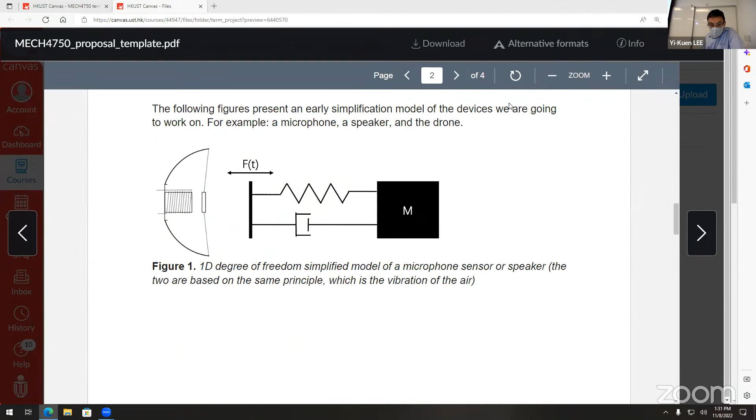I think it's time for me to ask the students to come up with this kind of project. Again, I told you in the beginning we have no final exam, but I do want you to think about how to work on some project on vibration engineering. If you look at our Canvas website, we do have some examples of this kind of project you may want to consider for practical vibration engineering. This is just one template for you to think about, to make a project. Of course, if you have your own idea, no problem. If you don't have an idea, I can also come up with some recommendations for you to consider.

Vibration engineering has many applications, so it's really up to you to think about what kind of project you want to do. In the past, if you wanted to work on something practical, I could also ask our Yunzhou Tech to give you a project related to their company's vibration engineering work. So what do you think? Do you prefer a project related to a company, or do you want to come up with your own idea? That's also fine. Do you have any idea about the project you want to do?

In the past, some students came up with their own project, and some students wanted to do something different. Yunzhou Tech is run by one of our students, a key student. Do you know how big the company is now? It's about 600 people now. Is there anything you want to work on related to some company or thing?

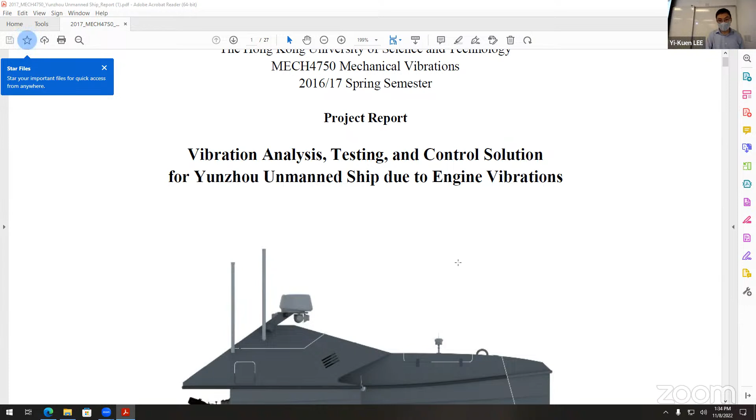I want to ask if you want to come up with your own idea, or work on a project related to a company like Yunzhou Tech. I know the founder and CEO personally, he's actually a graduate of our program. He has 600 people in his company now, and I know they intend to do an IPO and become a public company. You can look at the introduction of Yunzhou Tech. I think it's quite impressive, they really do a good job. This company does good work and has so many products. What do you think, would you like to work on a project related to this kind of company?

In the beginning, the first prototype he made here on campus was an electrical ship for water pollution monitoring. Then he quit his PhD program and started a company. Now he has 600 people. Mr. Zhang Yunfei is a pretty big boss now, 600 people, it's pretty impressive. He has so many products now, and originally it was only for pollution monitoring, but now there's a lot more. It's quite amazing to see that our students can really do a very good job. If you look at what they have, it's very impressive at Yunzhou Tech.

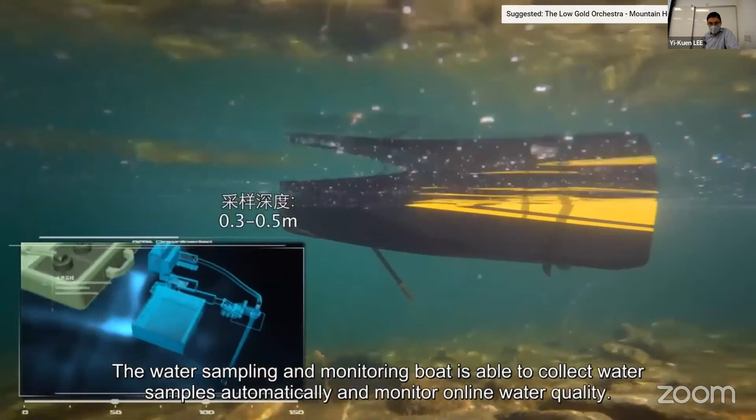The water sampling and monitoring boat is able to collect water samples automatically and monitor online water quality. The software can output water quality parameters, contour maps, and track pollution sources. The water surface cleaning boat can collect floating garbage on water. The hydrographic survey boat is designed for automatic underwater survey and mapping, greatly increasing the survey accuracy and efficiency of traditional operations. The industry leader, USV, will continuously dedicate itself to safety.

Well, what do you think? Do you want to do something related to this kind of company project? I could talk to the CEO and ask if they have some ongoing new project for the product. What do you think? Anyway, it's up to you, but if you look at this reference, some students came with their own idea for the project. If you want, we can discuss it further, okay?

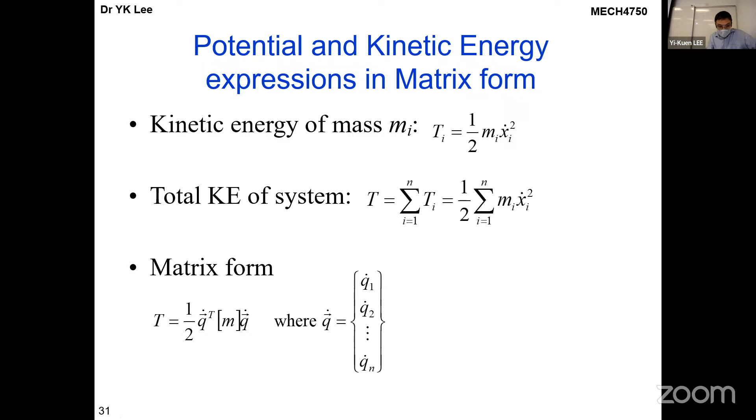Then we can sum up this energy. So we have an n-degree freedom system with n masses m1, m2, ... mn, and the springs, and then... sorry, I think we need to think about this, and in general we can try to write down this.

If there's no damping, and we consider an n-degree freedom mass spring system in terms of an ODE system, this n by n matrix is what we'll show you how to get.

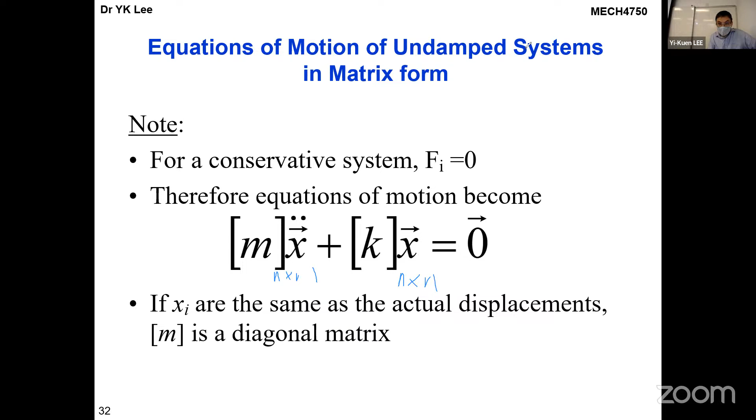And then the next one is how can we solve this problem under harmonic vibration? We can reduce this kind of ODE system, ordinary differential equation system, into a simplified linear algebraic equation.

So one simple way is we assume a general solution, so that for each mass, x1 for mass 1, we have x1 as a function of time multiplied by a capital X, this vector, and t. Capital T is a time-dependent function. This is a vibration amplitude vector. So each m1 we have a certain x1, m2 we have x2.

So this is a general solution, and then we substitute into our equation of motion. Eventually we do separation of variables, and we can rearrange this complicated equation, moving all terms related to the time-dependent term, capital T function, to one side and the other to the other side. Eventually, the left-hand side is independent of i, and the right-hand side is independent of time.

So in order to satisfy this kind of rearrangement, basically it's a simplified equation of motion, Newton's law. But in this way, because we make the assumption xi equals X times T, we can simplify this. So this is basically Newton's law in simplified form. In order to satisfy them, this one can only become a constant. So in this case, we can assume this constant to be omega squared.

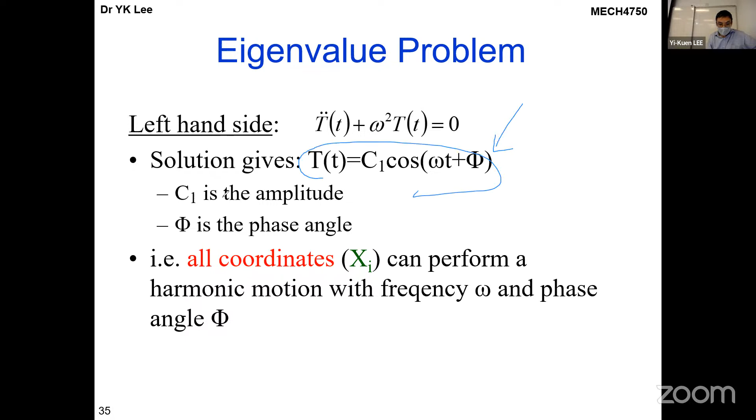So in this case, we arrange and find the left-hand side gives one equation for this time-dependent function, and all of you should have no problem with this, it's a second order ODE, so the general solution is this. The same thing on the right-hand side, we have another equation, and that is related to the eigenvalue problem.

So eventually this is the matrix K minus omega squared M, multiplied by this vibration amplitude vector, basically x1, x2, up to xn. This is n by n.

So in order to get this solution, this vector cannot be zero, only the matrix can be zero. So we let this matrix equal zero. The only thing you do is set the determinant of this matrix to zero.

And finally, this is exactly what we learned as the eigenvalue problem, like you learned in linear algebra. So omega squared is the eigenvalue.

I think officially we can use this way to reduce the problem. The key thing here is that under free vibration, there's no harmonic force applied, so the equation of motion reduces into this eigenvalue problem. This is an important point.

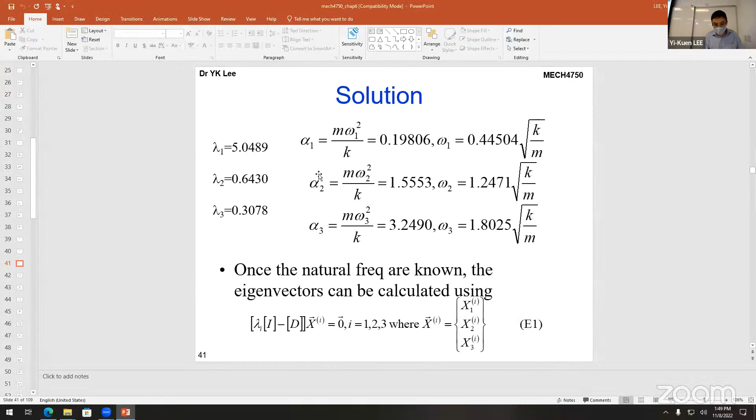That's something we'll show in our previous example. But what's important here? I think we already showed this example, so I'll skip this part, maybe just quickly repeat it. This is the problem we have solved. Let me try to use MATLAB now.

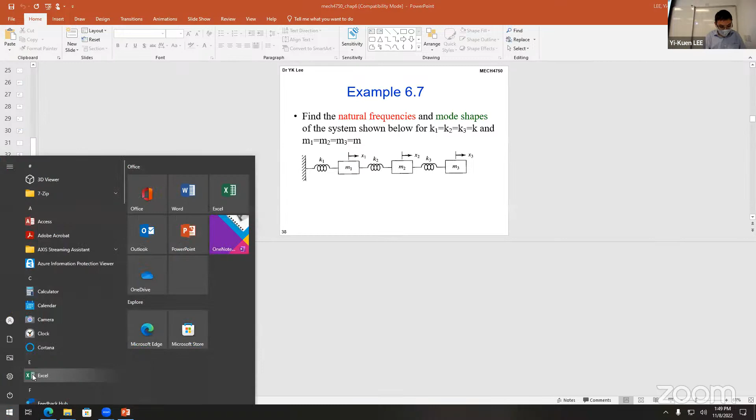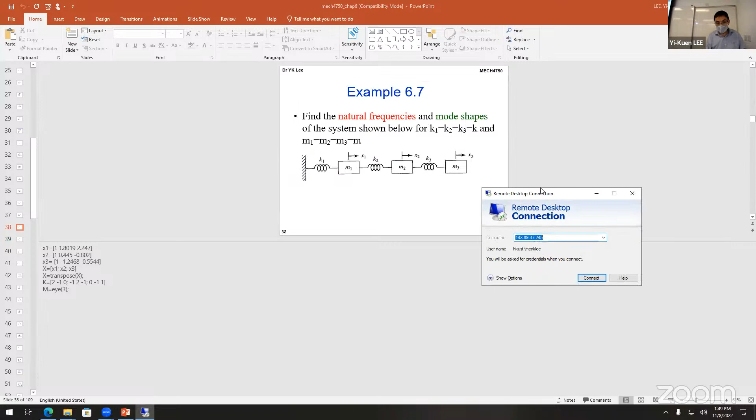Let me quickly show you an example for this 3 degree of freedom problem. If we know the M, C, K matrices, how can we use MATLAB?

So we already have this. Let me quickly go through it. For this example, we know all the mass and stiffness values: K1, K2, K3 equal K, and M1, M2, and M3.

In this case, with MATLAB we can easily build the K and M matrices. So with MATLAB, I'll show you that we can easily find our M and K.

And then the next step, of course, is to use the EIG function to get the dynamical matrix. We calculate our dynamic matrix, the inverse of K multiplied by M, and then use EIG to determine our VV and DD.

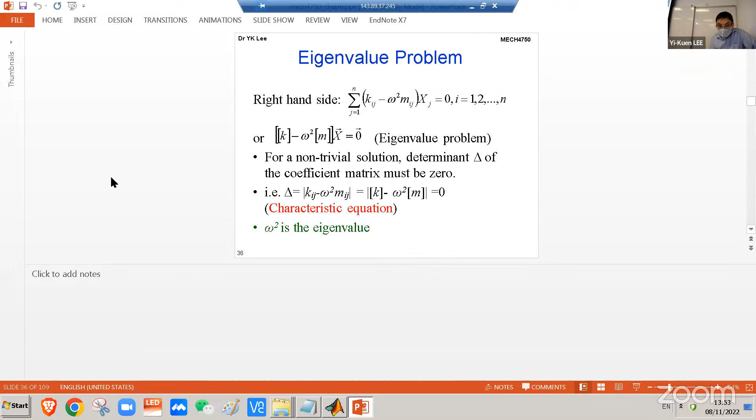Okay, and then next one is calculate omega. Remember, because omega is related to the inverse of lambda. You look at the equation with the right, so that's our dynamic matrix here, so that lambda equals 1 over omega square.

So in this case we can find our omega equals square root of inverse of lambda. Remember this period, because this is a vector. So when you do this, if you don't have this, then you get some problem, an error. If you use this guy, then no problem. If you don't use this period, then whatever you get is not correct. So we want to divide by each component of the lambda vector, so that we can get the right solution here. So this is our omega, actually related to omega square.

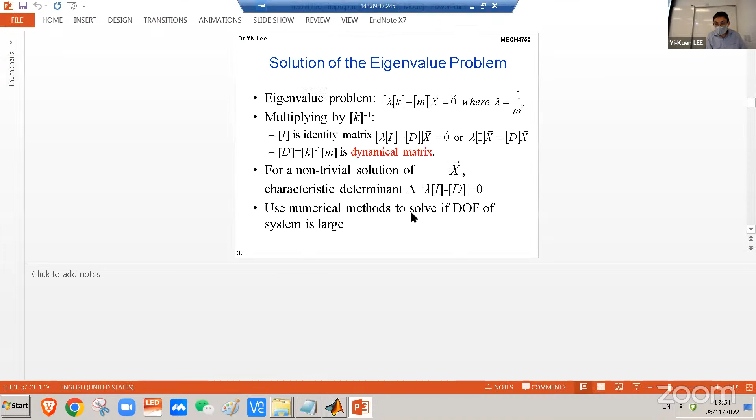So we need to do square root of this kind. If you look carefully, we need to use this kind of square root. So this becomes omega, and then of course the next one is we can collect those here.

V1, VV is a stack of 3 vibration modes, right? So this means we try to collect the first, basically VV here.

Right, so basically we have X1, X2, X3. So in this case we try to collect this one, we try to find the first column. This means first column, one, first column of this VV matrix, and then this one second column, and 3, 3, 3 here, third column. So in this case we can get the vibration mode for V1 for first omega 1, V2 omega 2, V3 omega 3. So this is the one we can use MATLAB to calculate it.

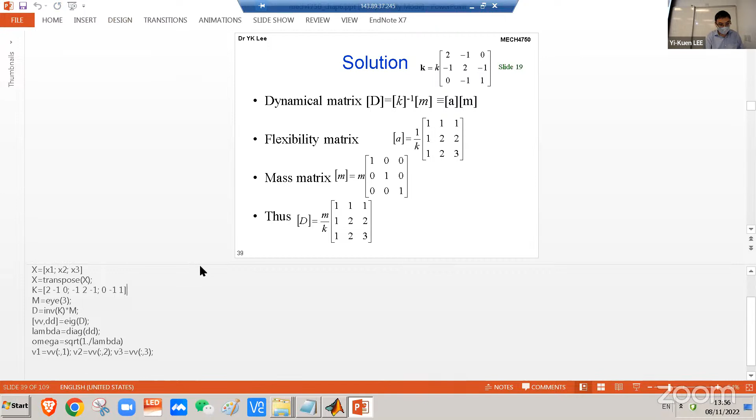And finally, what's the next step? We should plot this kind of response. You want to look at the vibration mode as function, so that eventually what we'll do is we try to think about how we can get this kind of vibration mode. Our goal is to try to study this kind of vibration mode.

So we show here, then actually I already try to plot this one. Let me quickly... And then of course, actually, I already told you that MATLAB can try to plot this kind of vibration. There's a way we can try to do this kind of...

To place this kind of vibration as a function of time, so I hope you still remember, basically for each vibration mode it's a function of sine omega t. So once you find each vibration mode, in reality each vibration is actually multiplied by some kind of harmonic function. So each x1 basically relates to some kind of sine omega t harmonic at that particular frequency, omega 1. Why x2, vibration mode 2, equals maybe sine omega 2. So you can also ask MATLAB to try to plot this kind of time-dependent vibration of this 3 DOF model for your mechanical system.

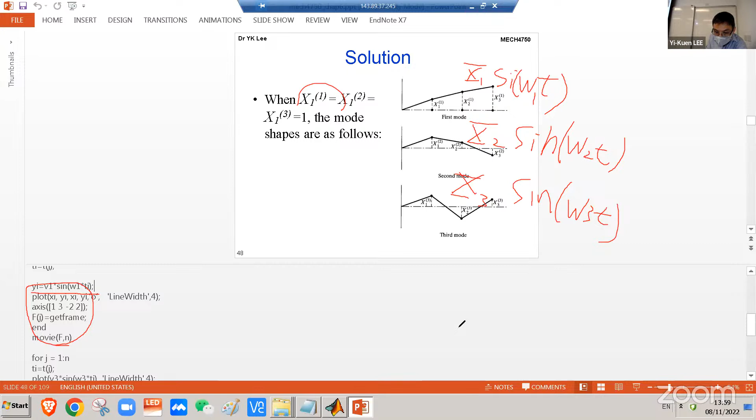So in this case, here I show you that we can use this kind of thing, for each vibration amplitude vector equals vibration mode times sine omega t, so that we can plot this one, and then for every time we plot this particular moment, and then we can make a movie to show this kind of vibration as a function of time. I don't know, do you still remember how we showed it? Basically, this is the way we can make this kind of animation to visualize vibration as a function of time. Do you have any question about this thing? MATLAB is useful, let me quickly show you this.

Right. So there's some problem. Oh, sorry, when I plot this one, I understand, we may need to... let me check if I need to. So do you understand what's the problem? Problem is this one. Sometimes we need to use this kind of... let's try to copy.

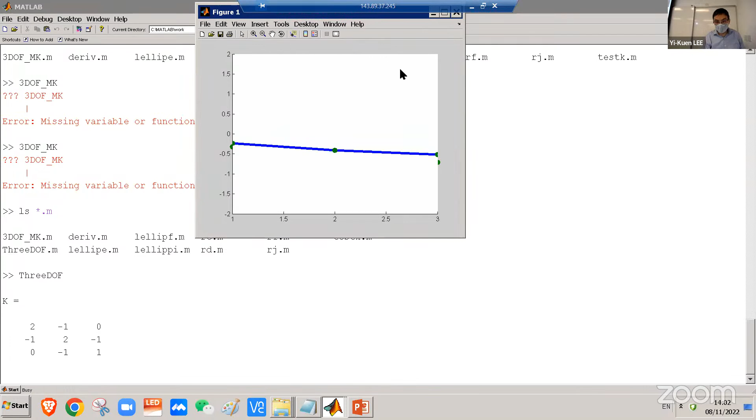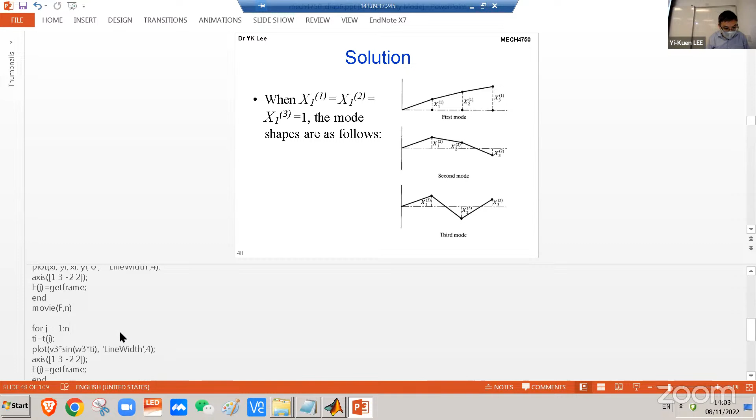We can visualize the second vibration mode, right? Using the same chip, basically for the second vibration mode, you need to get another V2. You use V2 and then try to plot V1, V2, V3, so that we can do the same thing.

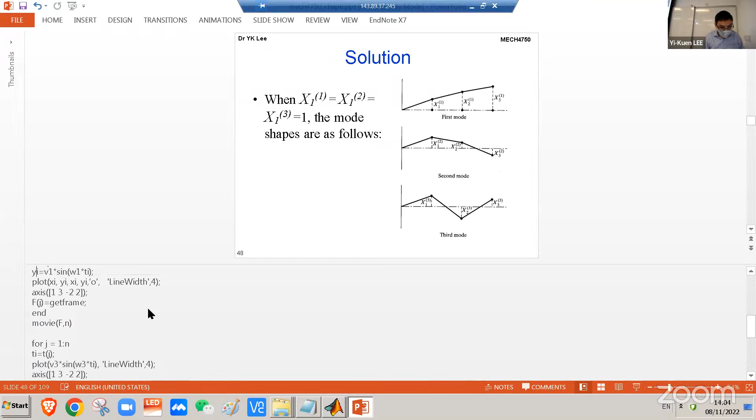Vibration 2. So this spatial natural frequency, they have this kind of vibration mode. And then next one is another. Finally, we have another vibration mode, right? V1, V2, V3. So all the others use the same method.

You just try to. I probably can go. So I have V3 and then another V2.

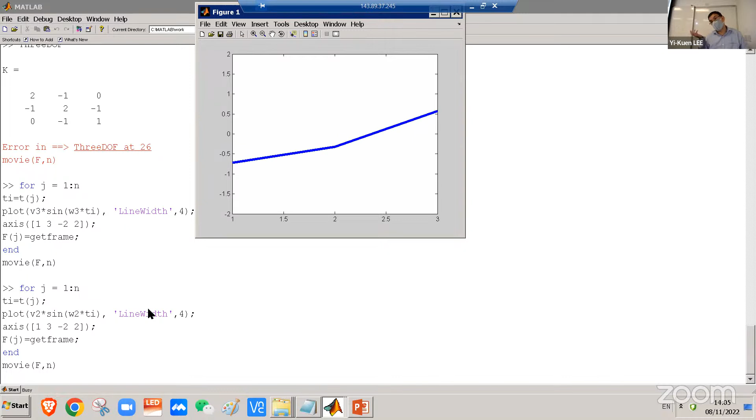So now I show you the number 3 vibration mode. Any question? Of course, this is the one with 3 degrees of freedom, right? So that in reality, if you have more freedom, then you can process more complicated vibration of a mechanical system. More complicated. Yeah, if you, this is on 3 degrees of freedom.

So I think this gives you this kind of introduction about how we can use MATLAB to... sorry.

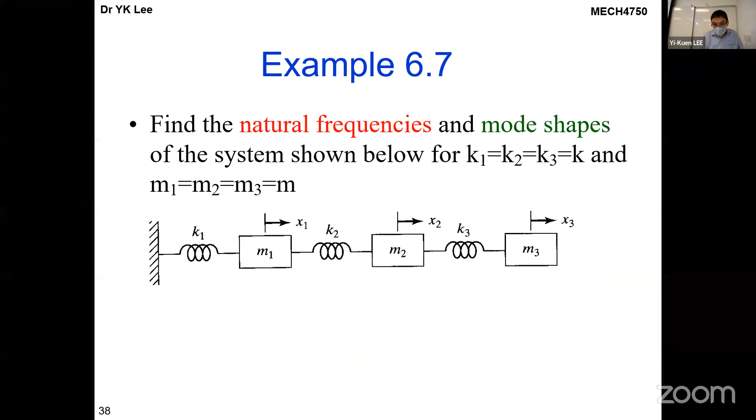So now the next question is I need to show you another important property, orthogonality of a vibration or normal mode. Sometimes we call this another name, sometimes we call it the vibration mode, right? Or normal mode. Vibration mode, we just showed you, right? And sometimes it's actually related to the eigenvector. Eigenvector, we just described here in MATLAB.

So what's the meaning of this orthogonality of the vibration mode? It means we can demonstrate this kind of thing. I will not show you all the mathematics, I just show you the idea. Actually, for each of these vibration modes or normal modes, they're useful for what? Basically, I'll show you why. In MATLAB, I'll show you this kind of x1, x2, and x3.

Why? So these vibration modes or normal modes have this special property to be orthogonal. Orthogonal means perpendicular to each other with respect to k and m. So this means vibration mode, this is a vector and this is a vector. So the x1 vector is perpendicular to x2 with respect to our m and k. So that thing is quite important. And x3 is also perpendicular to all the other things.

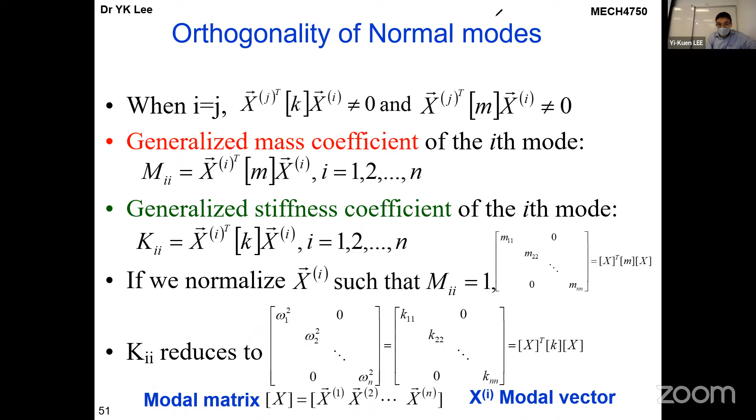Actually, we already calculated this in MATLAB, right? So basically this is related to the modal matrix, related to what we remember as our V, VV, and DD in MATLAB. Well, eigenvalue here, so that's basically what we just described - it's a modal matrix, and each one is a modal vector. So with this kind of property, we can really try to simplify our problem.

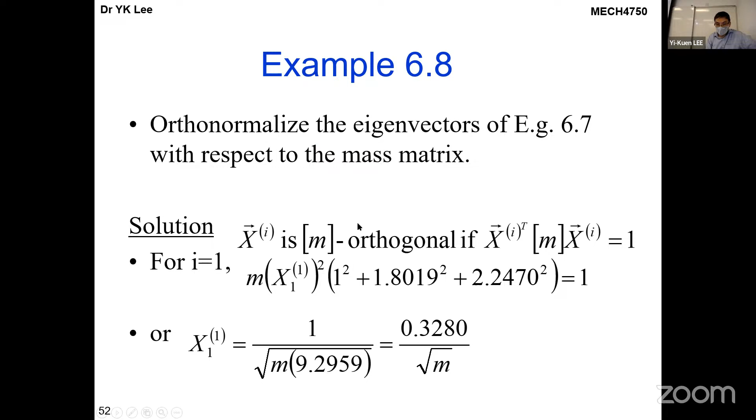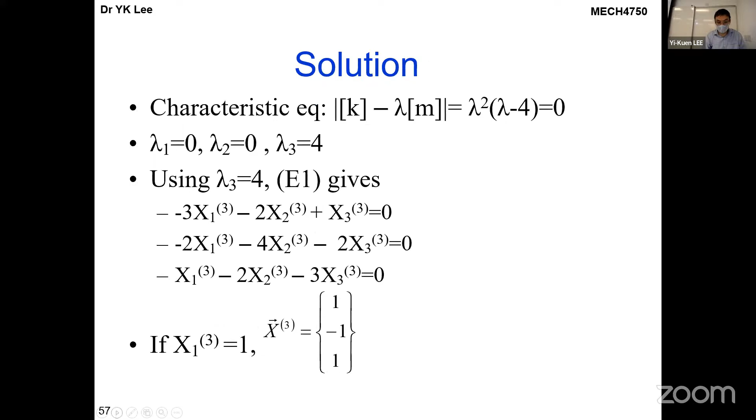Of course, we can show you this orthogonality of our previous one - that is very easy to show. Now they are really orthogonal. Do you see? And again, the most important result is we can really demonstrate that...

I will skip this kind of complicated mathematics - the goal is simple. So once we have found this natural frequency, eigenvalue, eigenvector, vibration mode, our n-degree-of-freedom vibration problem can be simplified as this kind of thing. So let me show you here.

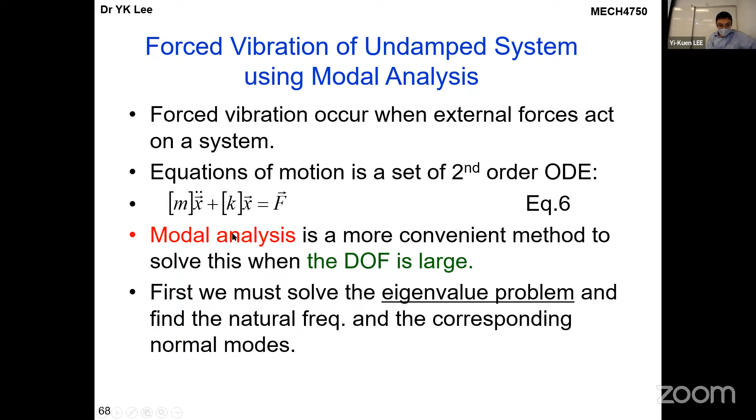Using modal analysis, if you don't solve for vibration mode frequencies this way, it becomes very complicated. We're solving an n-degree-of-freedom problem, and modal analysis is basically a tool we can use to simplify our problem.

I'll show you the result clearly: for n degrees of freedom, this vector is x1, x2, as a function of time, and xn, where n can be 1 to... It's basically a summation over n of vibration mode 1 with Q1, vibration mode 2 with Q2, multiplied together. So this is the modal matrix multiplied by the Q vector, which gives us the general solution.

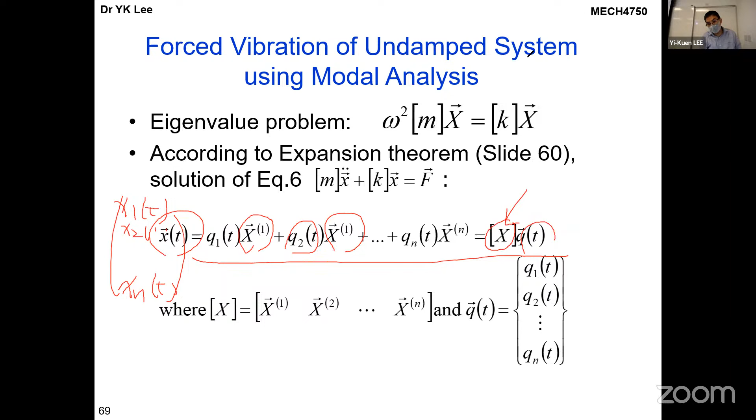With this modal analysis, I'll show you that we can reduce the n-degree-of-freedom problem into a one-degree-of-freedom model. This is our goal.

If we use this modal matrix, we can simplify our already complicated equation of motion from Newton's law, and do this kind of transformation. Originally it's a very complicated ODE system, but with this modal matrix - multiplied by its transpose and M, and with the vibration modes normalized - I can transform the system so that it becomes a one-degree-of-freedom, 1-DOF system.

Each Q1 relates to one vibration mode, Q2 relates to another - so we have Q1, Q2 for each mode, maybe omega 1, omega 2. This means in this case we have a one-degree-of-freedom problem.

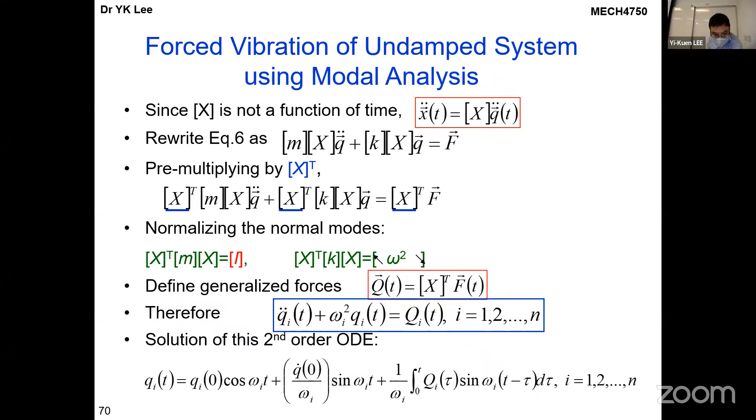Once we get the solution for each vibration mode - Q1, Q2, Q3 - we can do the transformation again, and eventually determine the vibration for each mass, M1, M2, M3. Once we have the solution for each vibration mode as a function of time, we can easily determine the vibration for each of M1, M2, M3.

That's quite important. With this modal matrix it becomes clear - based on the intrinsic properties of the mass matrix and stiffness matrix, eventually we only need a very small number of vibration modes to describe a very complicated mechanical system or product. This is one of the important benefits: modal analysis is very practical for simplifying real vibration engineering problems.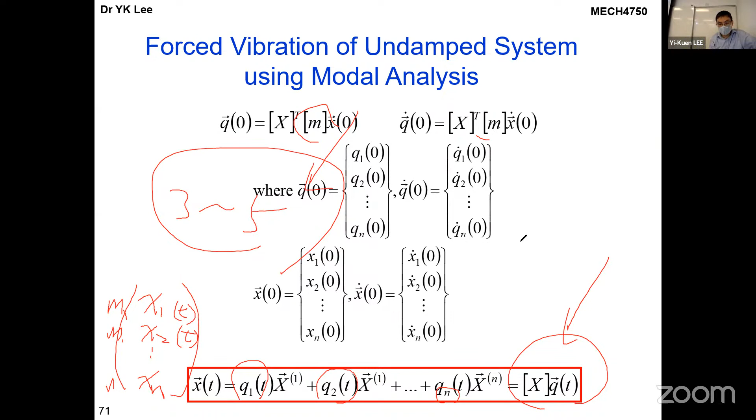So we don't need to use all n modes - typically maybe 3 to 5 vibration modes would be enough to get a reasonable estimation of the real vibration of a mechanical system. This is something important for all of you to think about.

Of course, let me quickly show you some examples.

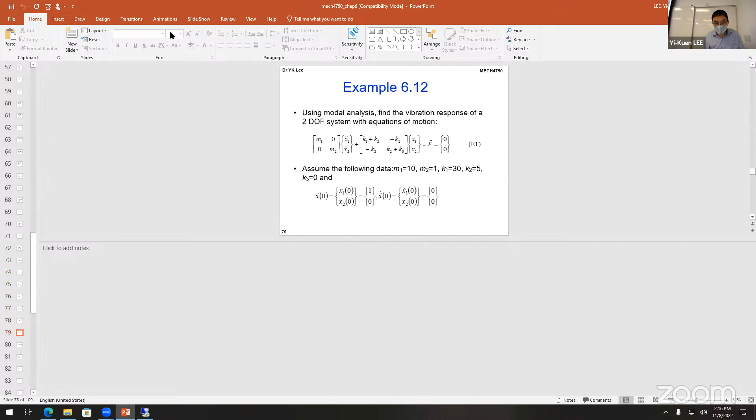Modal analysis for this kind of problem we described: for a 3-degree-of-freedom system with M and K matrices, if you use modal analysis you can simplify and converge M and K. Here I show you why we determine the vibration modes - 3 vibration modes - and stack each vibration mode into the modal matrix: vibration mode 1, 2, 3, along with M and K.

With what we've described, the transpose of the modal matrix multiplied by M and X - in this case we can get this result, which lets us simplify our original very complicated system.

Similarly, I can show you the orthogonality of these two vibration modes: take vibration mode 1, multiply by the K matrix and vibration mode 2, and when you calculate it, the result is almost zero.

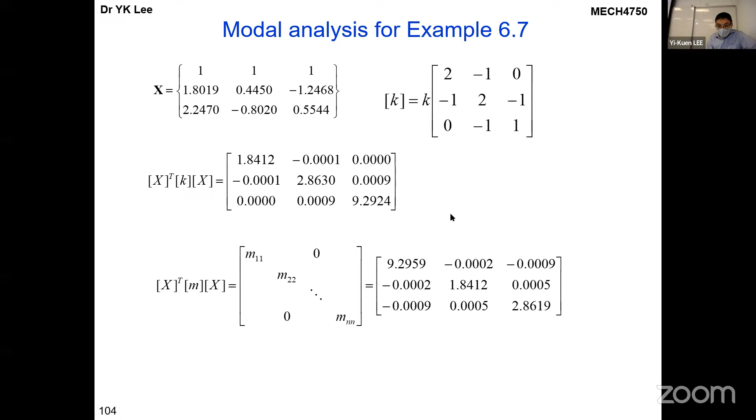And then eventually, once you do this, you see we can really try to do transformation with this kind of modal matrix. We can transform the original matrix into what? A diagonal matrix. This becomes quite important for us to simplify things.

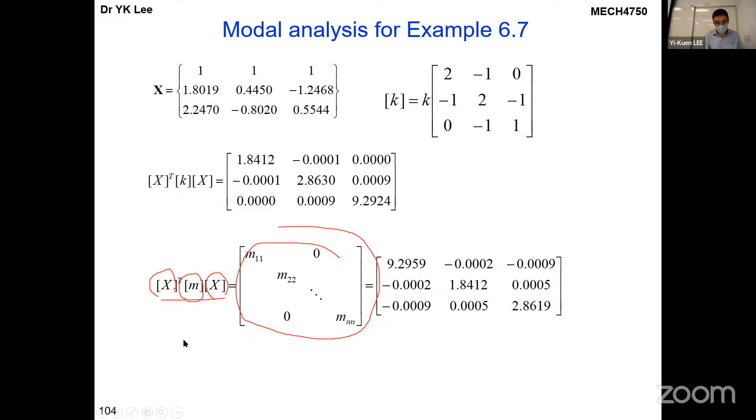The same thing, let me show you. I think you may want to see a real-world engineering problem. This is a 30-meter, well actually a much larger telescope project, costing almost $990 million. And how do engineers do this project? It would be interesting for you to look at the video of this project. Let me show you this kind of big vibration engineering project.

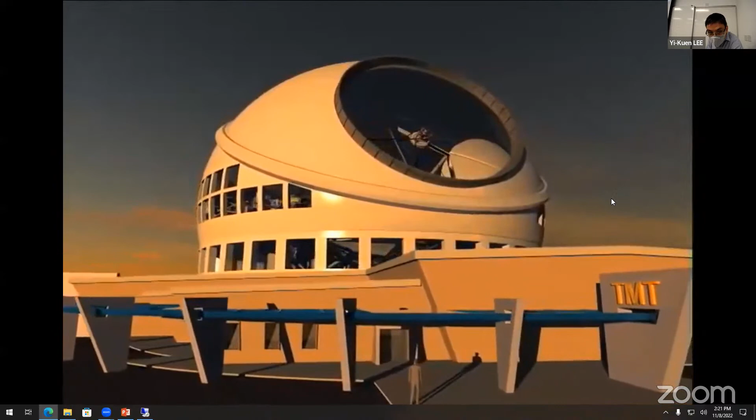Imagine yourself now in 2016 being invited to the opening ceremony for the 30-meter telescope, and imagine that you've been to see the 200-inch telescope. The first thing that will hit you is, of course, it is a larger dome, but not that much larger. What is greatly different is that the telescope occupies a much bigger fraction of the dome, and the mirror is enormous, and it will hit you in the face because it's such a huge mirror. The mirror is 100 feet in diameter.

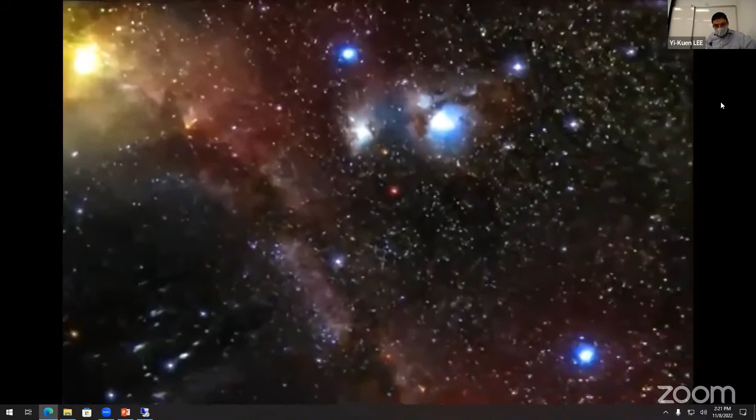The overarching theme for the 30-meter telescope is the history of the universe. It sounds simple, but really we're looking at understanding the origin of the universe, how galaxies like the Milky Way formed for the first time and assembled, how more complex molecules developed in space that leads to life forms. So it's a very grand but incredibly fundamental quest.

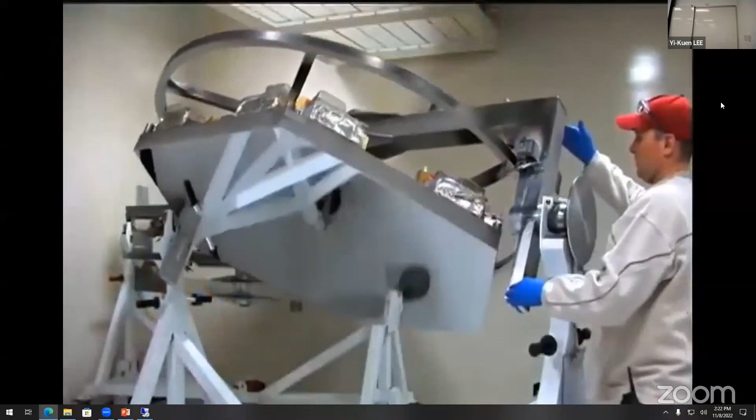The 30-meter telescope is a reflecting optical near-infrared telescope which has a reflecting primary mirror that's segmented, with 492 individual segments that combine to make a 30-meter aperture primary mirror. The light is reflected from the sky to a 3.1-meter secondary mirror and down to a third mirror, which we call a tertiary mirror, which rather uniquely can rotate to reflect the light to any one of a number of instruments. On the 200-inch telescope, instruments weighed a maximum of 1 to 3 tons, and here we're now talking about instruments potentially 20 to 30 tons or so.

The departure to a segmented mirror telescope was inevitable when we got up to the 8 to 10 meter class level. We would never be able to make a 20 or 30 meter single piece of glass. It would be extraordinarily difficult to support, and we wouldn't maintain the curvature over a very large area, and it would be impossible to transport.

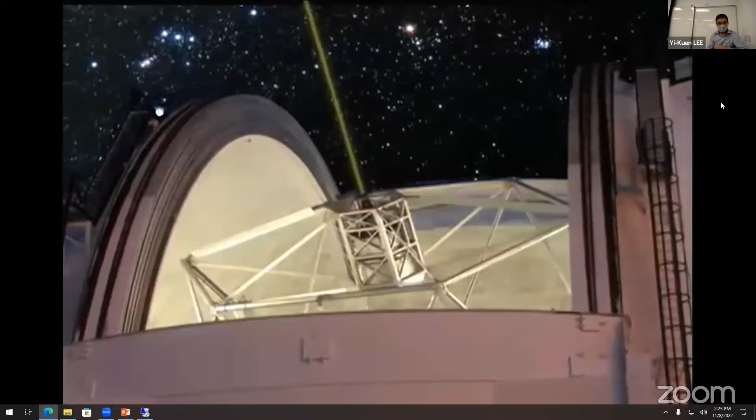Probably the most challenging aspect of the 30-meter telescope is the correction for the blurring in the Earth's atmosphere. This is a technique we call adaptive optics. It's already in regular use on our existing telescopes, such as Keck and Palomar. The way it works is we take the light from a reference image, either a star or a laser reflected off layers in the Earth's atmosphere, and use this signal to monitor the turbulence in the atmosphere. Now, the Earth's atmosphere doesn't behave in a very cooperative way. It's certainly possible to make this correction along one line of sight, but if you want to correct a cone of light coming through the atmosphere, then you need a number of lasers, each shining off different parts of the atmosphere, to create a correcting signal that can be applied to recover the true resolution of an object as if the telescope was in space.

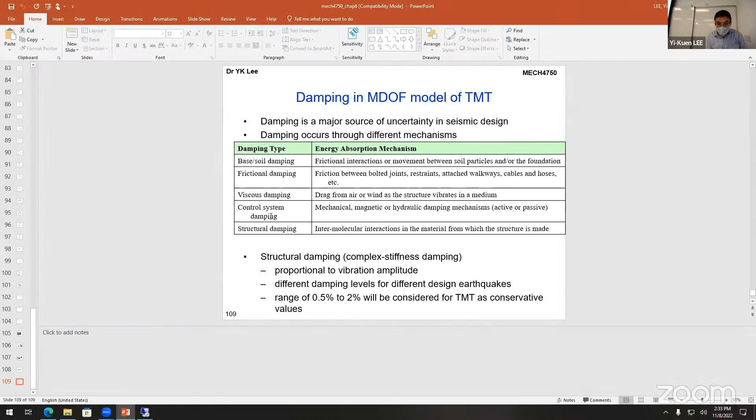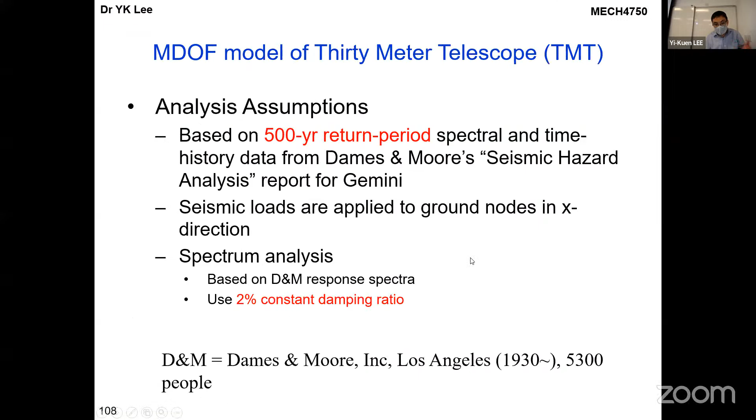Anyway, I'll just show you this. I can give you some additional reference papers on our Canvas website. At least this gives you a practical case study of this kind of N-degree-of-freedom system.

Why is N not 1 or 3? N is actually 35,000 elements, to really construct this kind of model to do this kind of analysis.

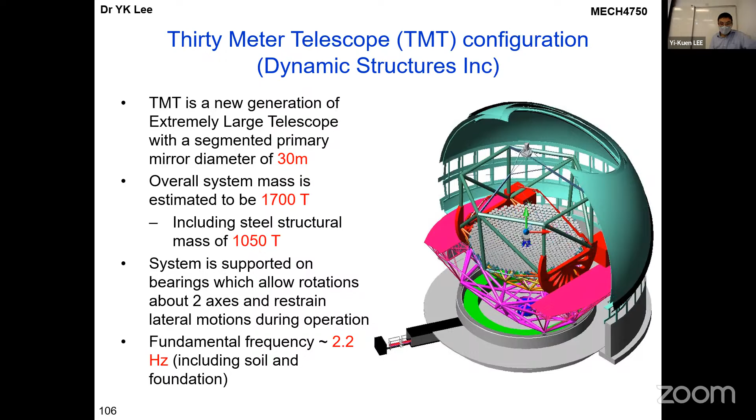Okay, do you have any question for this part? So that's why I show you this again. I do hope you'll find some of this content useful. I know some students may say they don't have any background in this area, but I'm showing you some real case studies because it's something important.

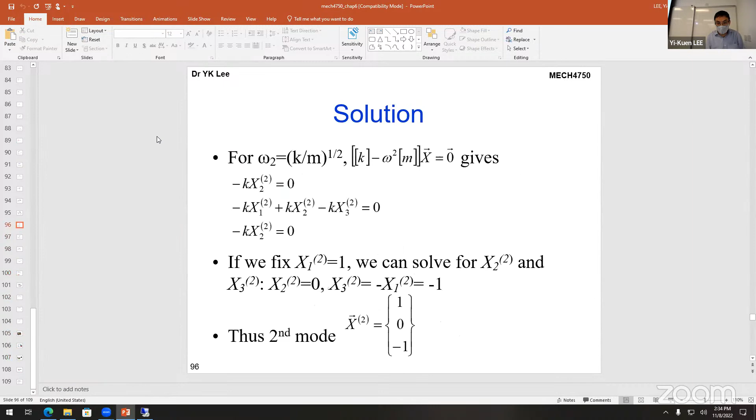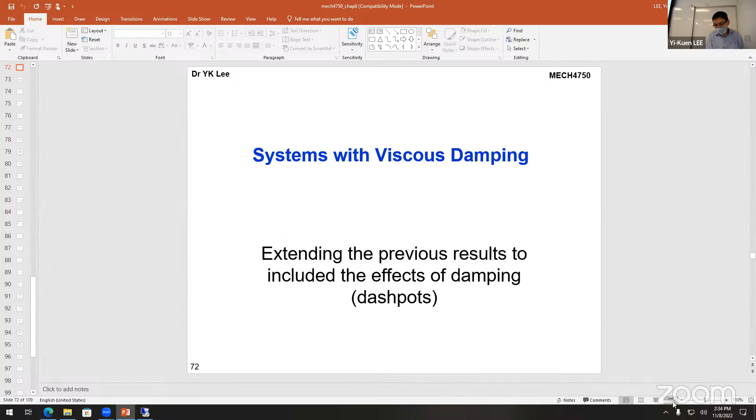Next, if you have no problem, I need to quickly go through another part about the MCK model - if we have damping, how do we look at this kind of damping when building the MCK model for an N-degree-of-freedom system?

Basically, there are two approaches. The first is just like this TMT model - we make some assumptions based on experience. In our TMT example, this is basically the model: we try to get some assumption, guess, or estimation based on physical elasticity, or try to model the damping. This is a typical approach in practical vibration engineering.

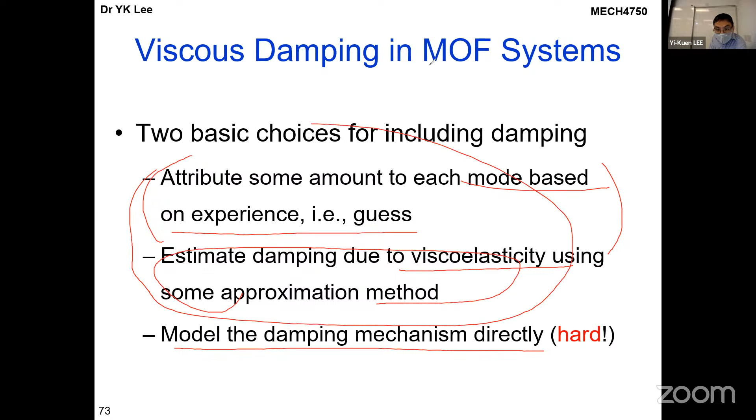Here we show you one approach called modal damping. Modal damping means, if we're able to use, for example, our simplified method described in this chapter, or FEM software, we can determine M and K, and then do modal analysis. In modal analysis, we find N vibration modes, and each mode will assume a certain damping ratio, a normalized damping coefficient. This is what we call modal damping.

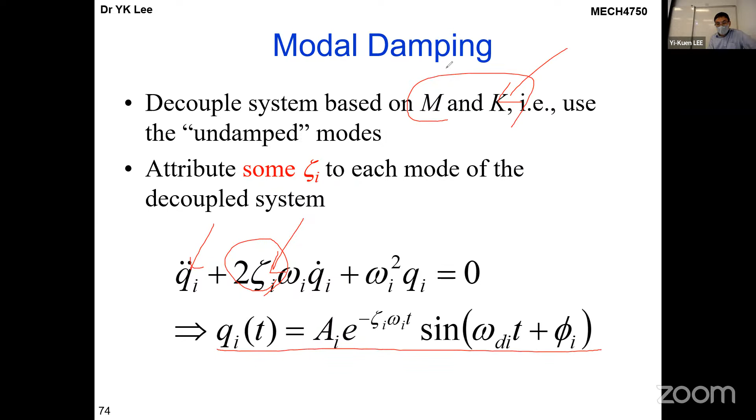Once you have this, we can easily do a transformation - we get the general solution for each vibration mode, and then convert it into physical space for each X1, X2, and so on. That's what we do.

The second approach is system-level damping. System-level damping addresses: if we have M, C, K, how can we determine a way to diagonalize M, K, and C? In general, it's not easy. So one approach in typical textbooks or even practical engineering is proportional damping, or Rayleigh damping. Basically, it's very difficult to diagonalize M, K, and C at the same time.

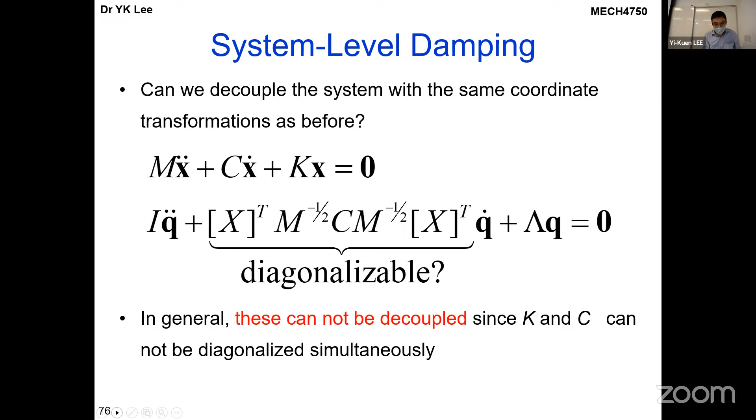If there's no damping, of course, I'll show you the vibration analysis eigenvalue - we can see if this is 0, it's easy. But that's why one idea came from Lord Rayleigh, more than 100 years ago, the very famous physicist in the UK. I can assume our damping matrix, N by N, is a linear combination of the mass matrix and stiffness matrix, where alpha and beta are unknown. This is quite important.

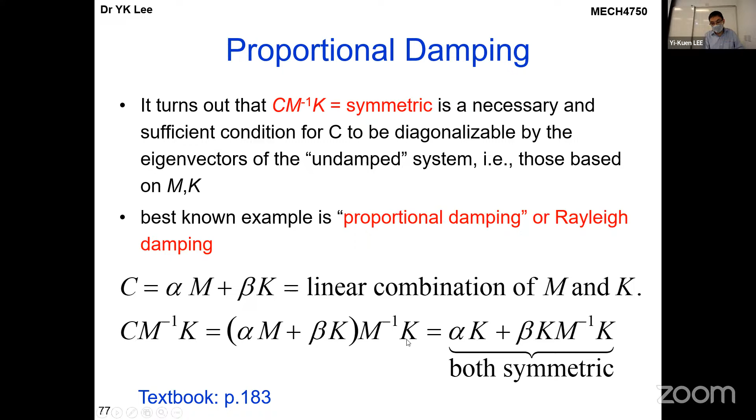That means proportional damping, or Rayleigh damping, basically assumes the damping matrix is a linear combination of M and K. Alpha and beta can be partly determined by vibration testing - if you use a motion sensor, like a smartphone sensor or some remote device, you get a vibration testing result, and then estimate alpha and beta. So this is the approach.

You see, once you have this, it's very easy. We can show why this MCK can easily, based on our eigenvalue analysis, give us a way to get the modal matrix, right?

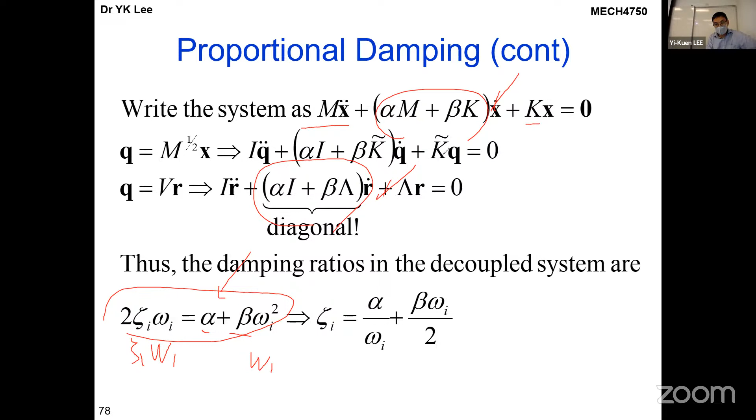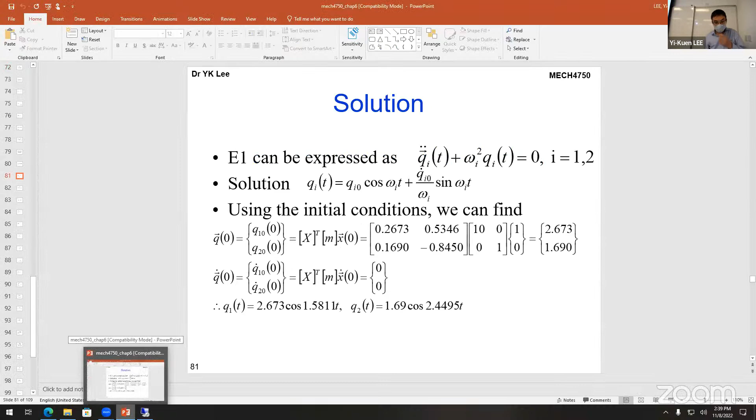And then I can easily diagonalize this kind of MCK system, right? So that this is something much easier. Eventually you can show this kind of alpha thing, in each vibration mode omega 1 with certain zeta 1, relating alpha and beta and omega 1 squared. So this is, at least for now, a simplified way to make this undamped MCK model practical for vibration engineering. This is very important, and I'll show you this is one of the important things we introduce here.

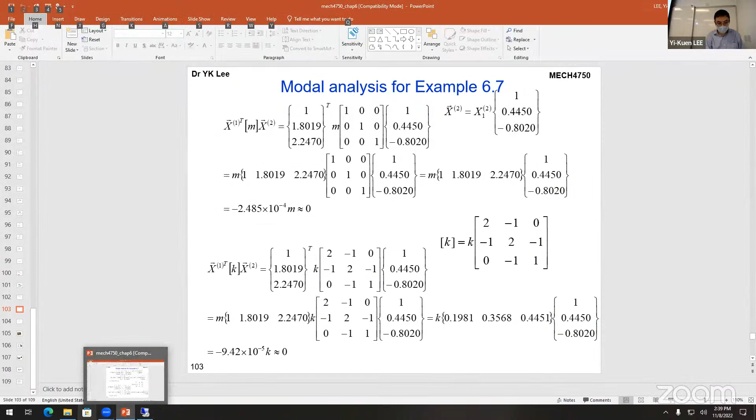I think we need to continue to the next chapter if you have no other questions. The next chapter is basically what we want to show in part: for some problems, can we go to vibration modes as N goes to infinity? That's another simplified way. Maybe I should only show one or two methods. This is about engineers sometimes being lazy, wanting to quickly analyze complicated mechanical systems without solving very complicated equations of motion. We don't want to solve this directly, so in this case, can we quickly determine the natural frequency and vibration mode? This will show you that approach.

Typically there's the Rayleigh method, matrix iteration, and the Dunkerley method. Why are these widely used in vibration engineering for many years, when computers were very difficult to access? Fifty years ago most engineers had a hard time accessing powerful computers, so how can you simplify the way to do it?

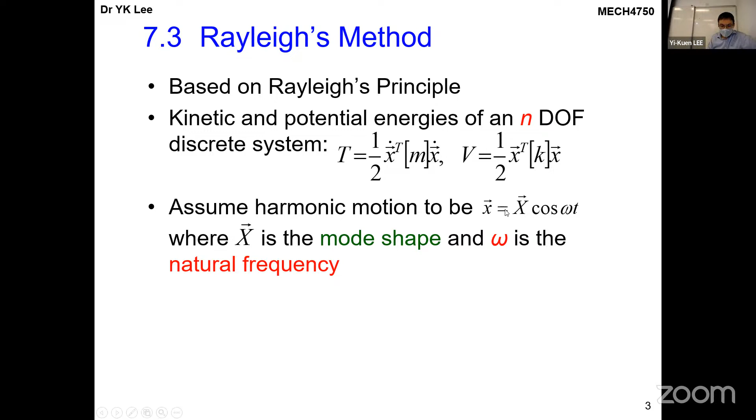Still, here the Rayleigh method will show you, based on the energy method. Basically, if your system has kinetic energy and potential energy under harmonic vibration, I can easily show you how to determine the maximum potential energy and maximum kinetic energy, T max. With this, I can estimate the natural frequency in a simple way. That's what I told you we will show.

For kinetic energy, it's 1/2 mv squared. Under harmonic vibration, 1/2... V equals harmonic x dot. Harmonic vibration means omega x, so in this case omega squared times vibration amplitude squared. And for potential energy, 1/2 kx squared under harmonic vibration gives 1/2 k times amplitude squared. So under harmonic vibration I can easily get T max. Setting these two equal, I can solve for omega. So for the one degree of freedom model, it's very easy.

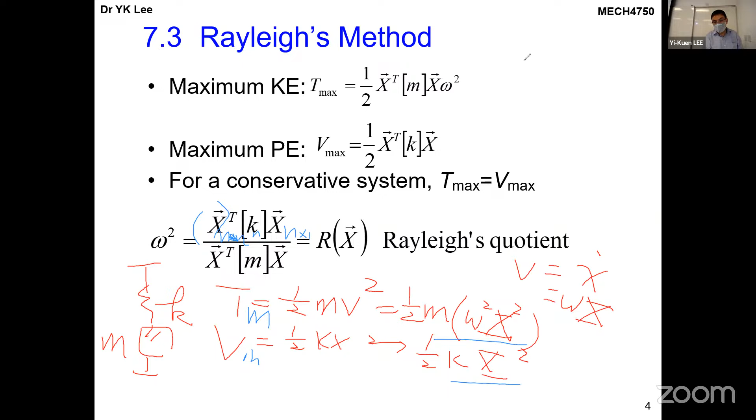But for the undamped multi-degree-of-freedom case, we need to consider the matrix operation. It's also not difficult to imagine: basically it's kx squared, but now this is a matrix, n by n. Sorry, this should be the vibration amplitude vector, not n. This n by n matrix allows us to easily do the calculation. So this method, for the undamped case, is very easy. I just wanted to give you this idea.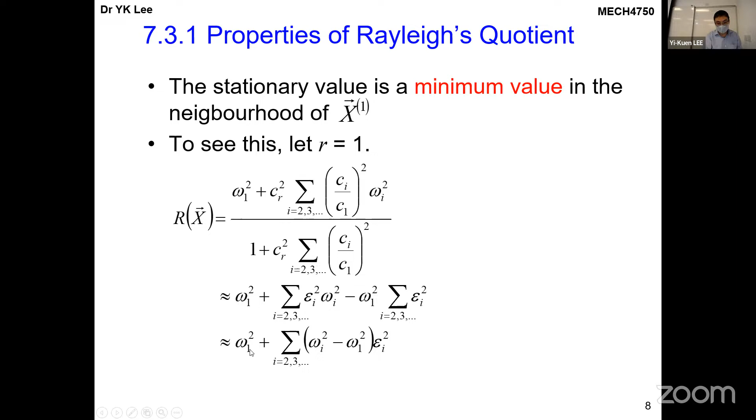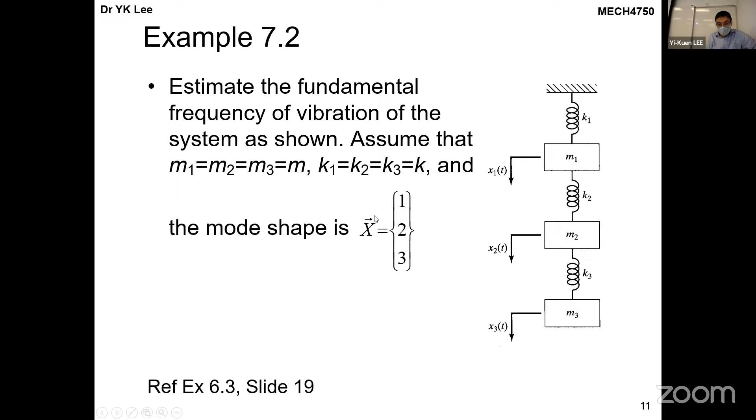Basically, you can assume a certain vibration shape, and based on this equation I can easily show you this. Let me quickly show an example for this multi-degree-of-freedom model. You can assume a certain x vector, and then using this Rayleigh method and Rayleigh quotient, I can estimate the natural frequency without solving the very complicated eigenvalue problem. It's a very simple matrix calculation - this is 1, 2, 3, which is arbitrary, but you cannot try to make some extreme choice. So this is a very simple way.

Let me quickly show you in MATLAB.

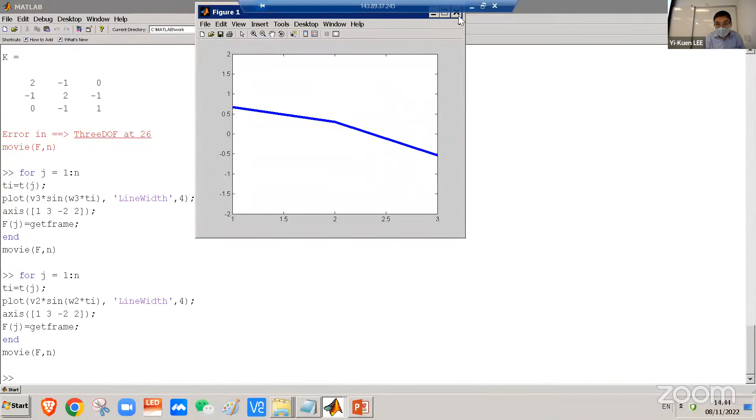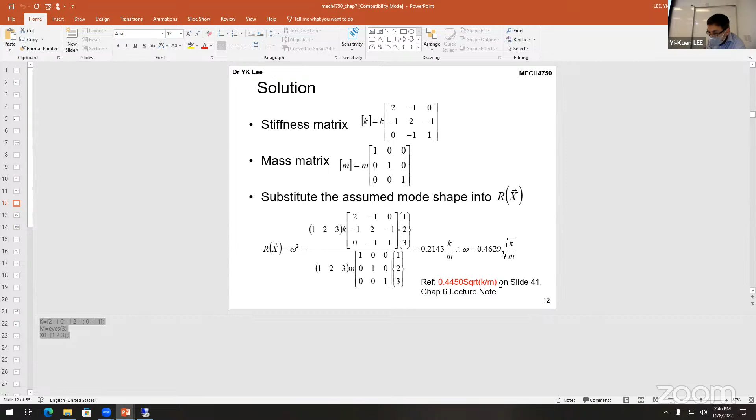Okay, so this is just to show you this kind of thing so that we can compare. I think very close, basically we can compare. So that omega square is 0.2143, and then omega is here. Compare with exact solution, if we solve the eigenvalue problem, it's 0.4450. You see, this is without solving a very complicated thing, we can get this kind of reasonable estimation.

So that's why this is a practical and simple quick and dirty shortcut solution. Sometimes engineers are lazy, so let me show you another example. If x0 is, for example, 1, 2, 2, what do you think? You can calculate here. If you change our assumption about the vibration amplitude, not 1, 2, 3, but 1, 2, 2, you get 0.2222.

That means you don't need to have a very precise assumption about the vibration amplitude, and your natural frequency prediction using this method is still reasonable. That is something quite interesting for engineers, right? Like 60, 50 years ago, when computers were not powerful, you could easily do this kind of calculation.

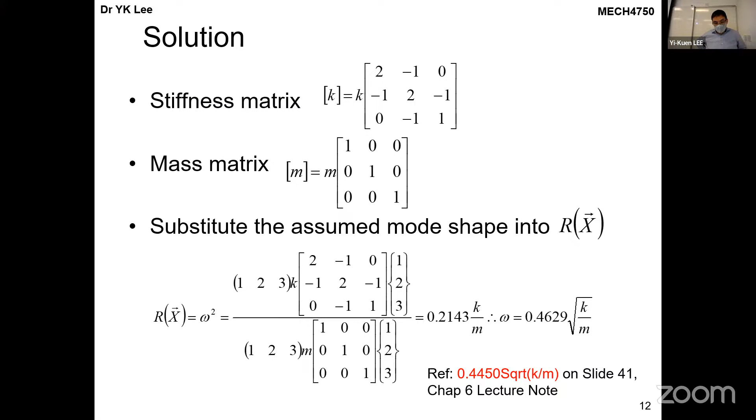So this is something quite important for you to look at here. And of course, there's another practical approach. In old days, if we have a real engine for a car with a gear train system, can we quickly analyze the natural frequency of the car's transmission system from engine to gear? Using a very simple approach, a static problem you learn in solid mechanics, for three gears, each gear we assume contributes certain loading and deflection, W1, W2, W3, so this is a way based on static deflection to determine our natural frequency without solving a very complicated equation of motion.

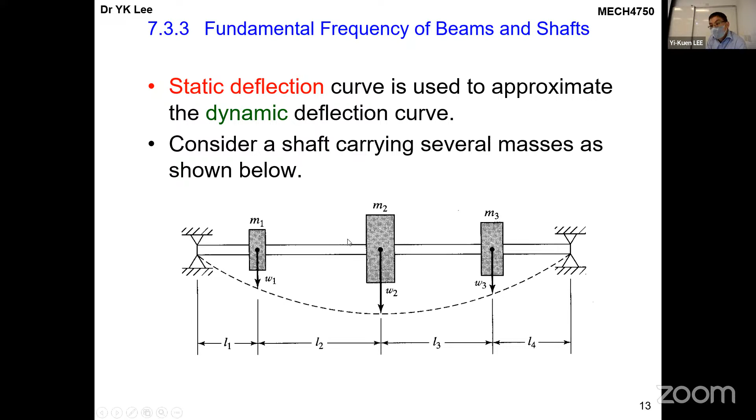Basically, this kind of thing is related to what we learned, this Rayleigh method. Once we have certain assumptions on static deflection based on solid mechanics, I can determine our maximum kinetic energy, maximum potential energy, and make them equal, so eventually the natural frequency omega is square root of g multiplied by M1 W1, M2 W2, and so on. Remember, W1, W2 are already this kind of deflection for a static problem you learn in undergraduate solid mechanics.

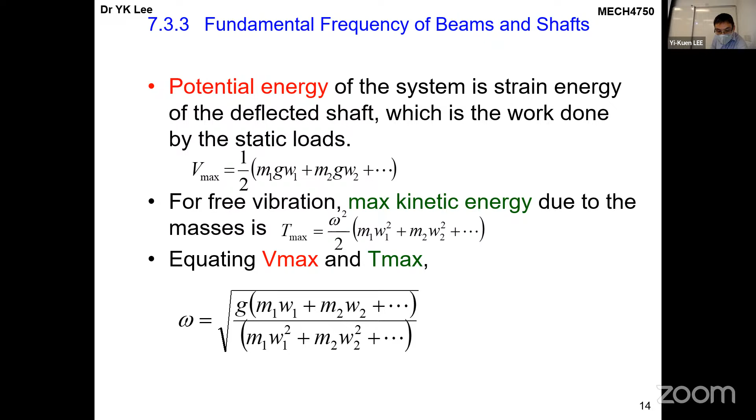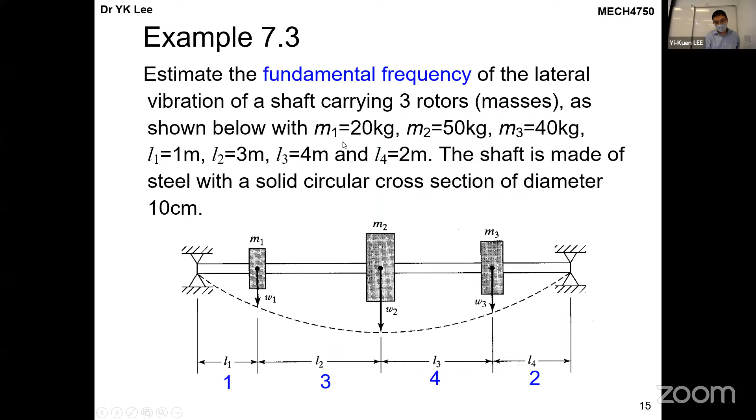So this is something I think is very practical, like many years ago when computers were very expensive and not every engineer could access them. Here I show you a real example: you have 3 rotors, maybe gears in a transmission in a car, M1, M2, M3, given certain mass and length. If you use solid mechanics again to determine this kind of deflection, as we've talked about many times, calculate the deflection due to M1, that's W1 prime, at the location of M2 and M3.

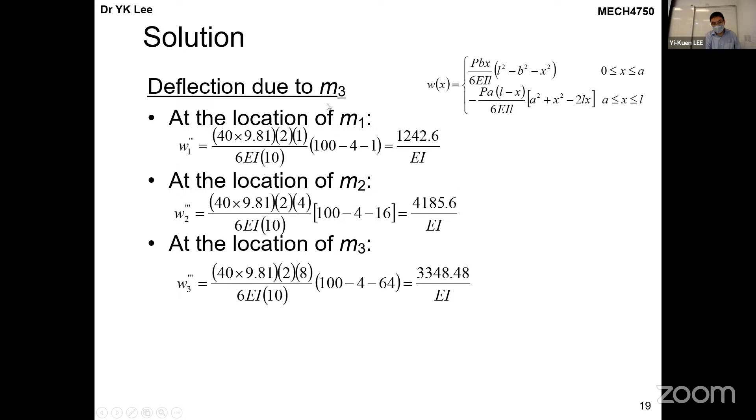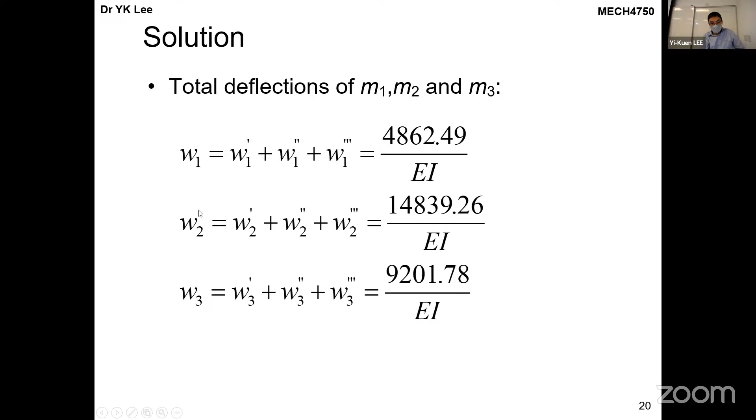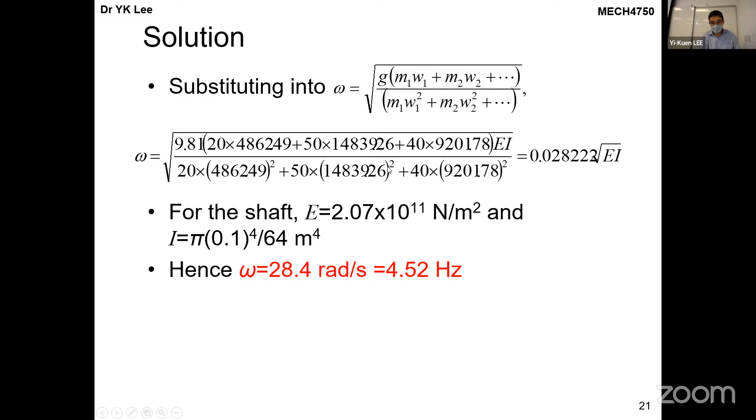And then the same thing, we can look at W1 double prime due to mass 2 and due to mass 3, and eventually the total deflection due to M1, M2 and M3 is here. So this is the static solution, and then we can easily use this approximation to determine the natural frequency. So that is, I would say, a very simple way to show you we can quickly determine the natural frequency of a more realistic vibration problem.